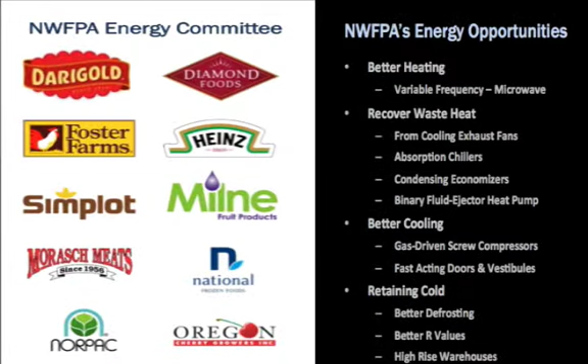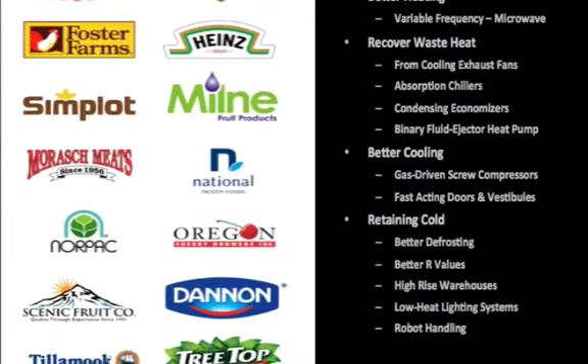So where did today's content come from? We worked with a pilot team of NWFPA members. They prioritized problems and opportunities for which externally developed innovations might be a solution for the entire membership. For each opportunity category, Emerging Tech Accelerator does a worldwide scan and identifies 50 to 100 solution possibilities. These short lists are then studied and ranked by the pilot team, and we invite the top-ranked innovators to present in this forum. I'll introduce the panel shortly, but first, here's a list of topics we'll be covering. If there's something you want covered that's not on that list, don't hesitate to ask using the chat screen.

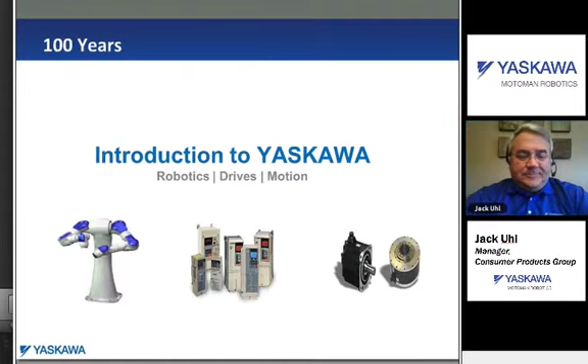Globally, we have facilities in 25 countries on 6 of the 7 continents, providing support from engineering, applications, and product development through assembly and integration. We also expand well beyond the food and beverage industry, with a presence in virtually all industries—from aerospace to medical, pharmaceutical, heavy industry, agricultural, and consumer goods.

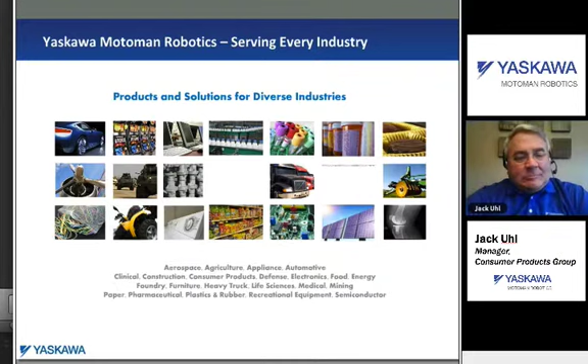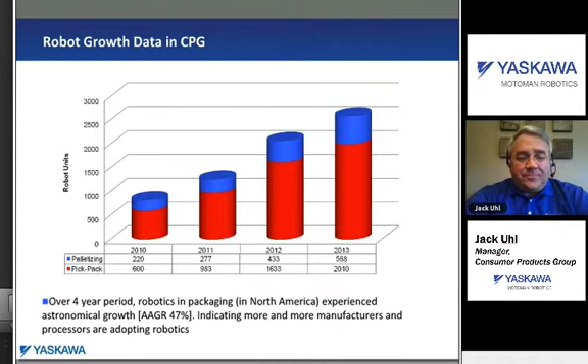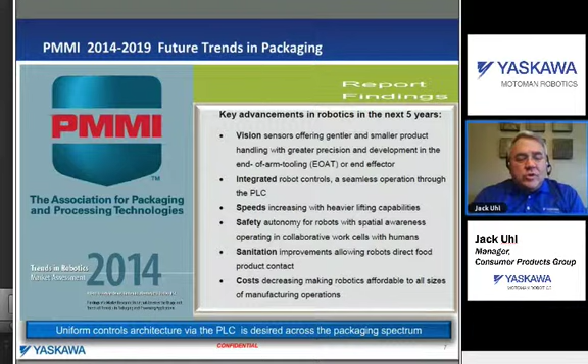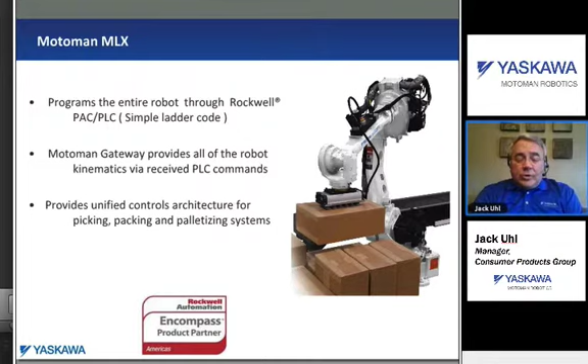We've listened to the customers, and the next slide will indicate some of the future involvements of that technology. We've defined the unified control architecture at Yaskawa as the MLX. What this means is we allow the robots to be programmed and controlled through a central PLC. In this case, it could be a Rockwell PLC, but it could be a Yaskawa motion controller, or it could be another brand of PLC. Ultimately, our gateway technology allows all the kinematics of the robot to be handled through our unique processor platform. But the operator interface and the programming of the cell is a very well-known ladder logic format, which is within the PLC.

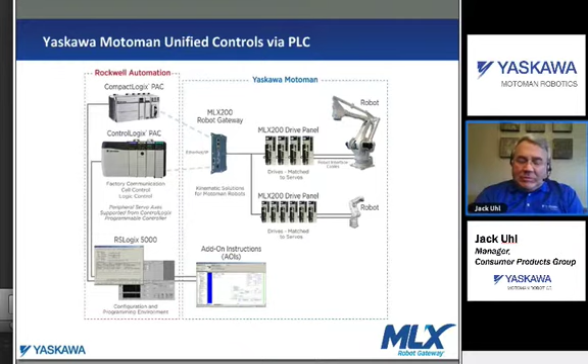And Yaskawa Motoman has developed this solution. Specifically, we provide our gateway module, which handles the heavy lifting of the robot kinematics, but a simple Ethernet connection to the PLC allows ControlLogix, RSLogix, to program the actual robot architecture. This is a unified solution—very simple, very cost-effective, without sacrificing anything in the controls.

So we take a big step back and we ask the question: well, why robotics in food and processing? Logical attributes: speed, accuracy, and longevity. It's a foregone conclusion that robots will last long beyond the legacy of the processing line. They are immensely accurate, many times more than what's needed, and the speed and repeatability of a robot can't be equaled by a human. So those are great attributes.

But when we drill down a little bit further, we realize that there are a lot of other positive attributes for the consideration of robotics within a food or food processing packaging environment. The first attribute, and what customers realize is one of the advantages, is flexibility. Robots permit operators to allow the actual cell design to be redeployed, reconfigured, and flexible for setup and operation for programming, which means a very quick changeover, a very simple operation.

The asset value of a robot is defined as a redeployable asset versus a fixed asset, which is a custom-designed palletizer, case packer, or picking scenario. A robot can be redeployed by simple programming and retooling to perform multiple tasks within an organization. Therefore, companies are realizing that they maintain an inventory generally of used robots and can redeploy them on short notice for other tasks and other purposes. The ease of use of robots, the unified controls, definitely provides an advantage for initial robot deployers and operators.

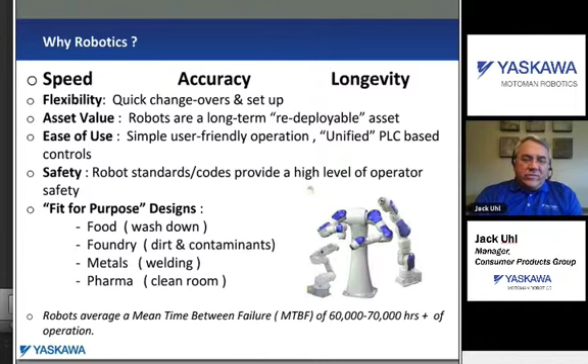So when we take a step further from the actual robot itself, and we've learned a little bit about the attributes and the benefits of a robot, now we want to drill down a little bit into understanding the complementary technologies that have also evolved that are deployed and utilized within robot applications. The first being vision. 10 plus years ago, vision was deployed, but those who had worked with vision realized that it was a challenging task because vision requires lighting, it requires contrast, etc.

The evolution and advancement of technology in vision have permitted cameras to be more intuitive, extremely powerful. But the tasks associated with vision have also required that they need to recognize parts and orientation, size the parts, understand if there's a defect, etc. The video will show us a little bit more how vision is deployed in a practical application.

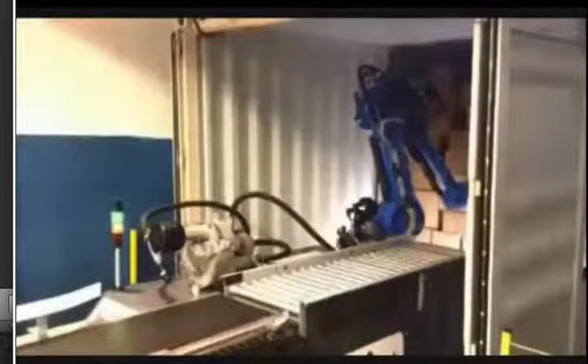We're showing here one of our Motoman partners who has developed technology for utilizing robotics for truck loading and unloading. If you look inside the trailer, you'll see a myriad of different size cases, and the robot is executing an initial mapping task with vision and lighting to understand and see basically where all the grid coordinates are for all of those cases. Those grid coordinates are then very quickly and efficiently mapped to the robot control for trajectory execution.

So the robot simply follows its map of coordinates of all the location of cases, and ultimately performs the task of seeking those particular cases in a very precise orientation and discharging those on a takeaway conveyor. So this is what's defined as spatial vision, and this is one of the attributes where vision has really evolved from a 2D dimension ultimately into a 3D dimension. Thank you.

As far as tooling, obviously robots have a kinematic profile like a human being. So again, we're migrating from the skeleton of a human and applying, in simple relative terms, deploying technologies to emulate what a human does. So the next step would logically be the tooling, which is in essence our grasping hands or fingers, etc. Tooling has been very generic for many years.

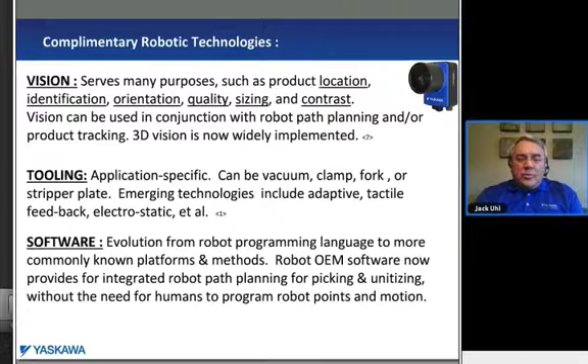Vacuum cups, clamp paddles, forks for bags, maybe a stripper plate for cans - and certainly that's probably the 80-20 rule. 80% are generic tools and they work fine and they're very functional. But there's a lot of different technologies now in end-of-arm tooling that allow robots to be deployed because of the tooling capability, whereas prior they inhibited the robot deployment. So the next video will show, again, just a smattering of some pretty neat technologies as far as the evolution of tooling.

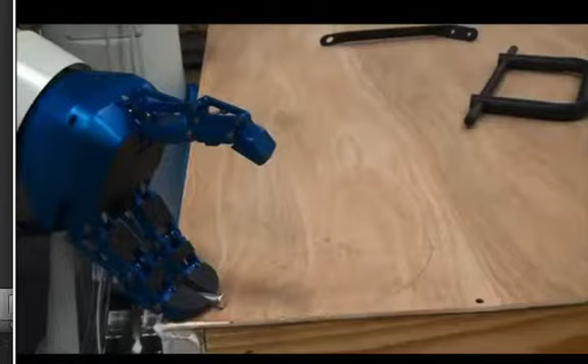This is a tool by one of our partners called Robotiq. It's a 3-fingered tool, and one of the advantages of this is certainly the dexterity. Each finger has multiple joints. It can work on multiple axes, from either a side clamp or a collapsing multi-joint grasp.

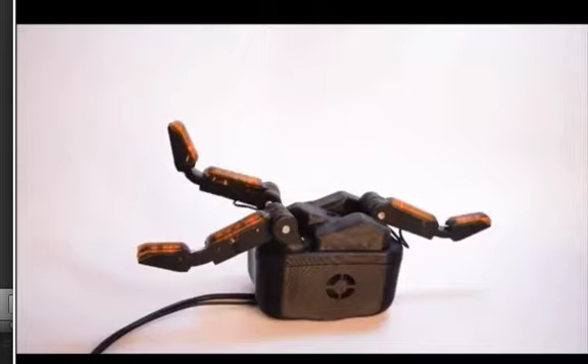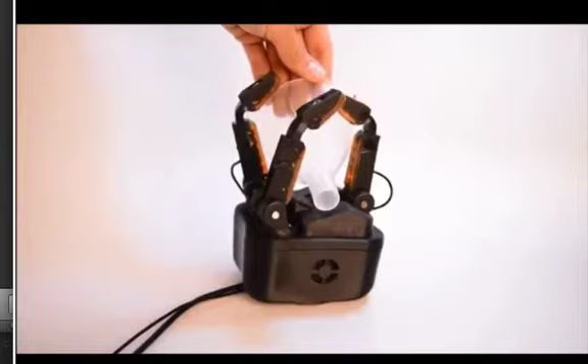This has evolved into a similar type of technology, by Rethink Robotics, or Right Hand Robotics. This is actually a tactile feedback tool. If we look very closely, the actual fingers have tactile feedback. The purpose for this would be to grasp very light, very flexible, very unique profile parts. The tactile feedback allows the force spectrum to be interpolated and commanded to apply the correct grasping force.

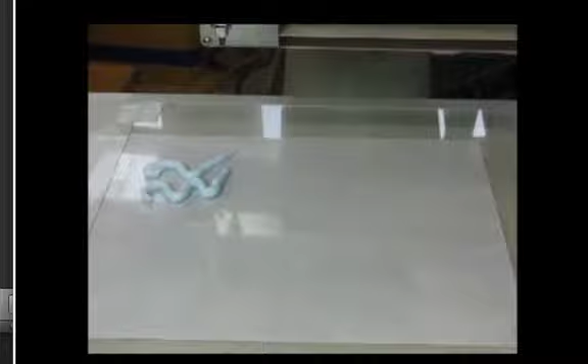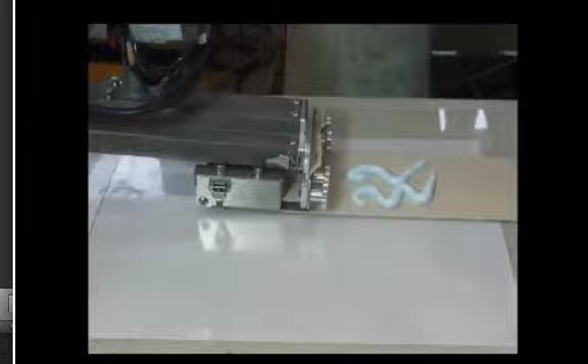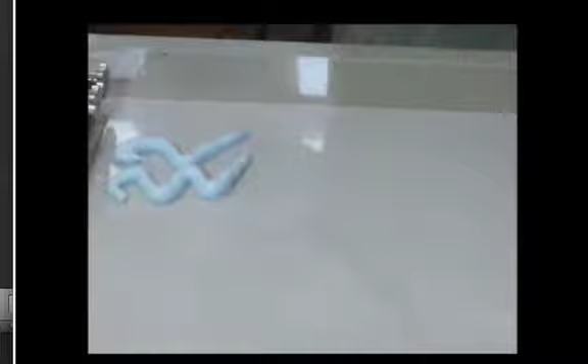Without ultimately crushing the product. This particular video is a micro belt swivel tool. This allows for showing an actual liquid, or a foam if you will, being able to be picked off of a bed and relocated without disrupting the profile. This again is just an example of an out-of-the-box tooling solution, but it does illustrate that with technology and the emergence of product profiling, we can develop tools for very unique product profiles and tasks.

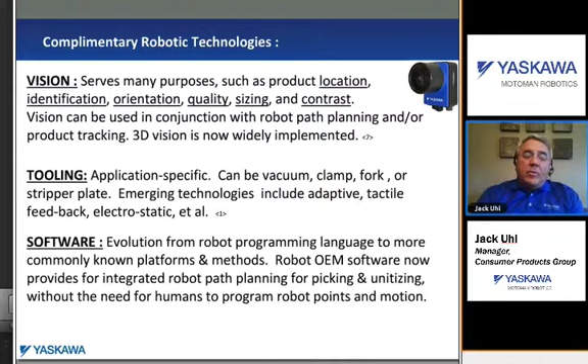Software is ultimately the brain of the robot. The operating software from a robotic platform can be intrinsic to the actual product profile and path execution of the robot, but robot OEM manufacturers such as Yaskawa Motoman have evolved the software to provide task-oriented software solutions. An example would be palletizing, which we'll show on the next slide, where it allows the actual robot execution to be pre-pathed and executed by the software rather than allowing operators to command the pick points and trajectory points. Motoman has developed what we call Pallet Solver.

It is extremely powerful offline PC generated palletizing software which allows for the importation of palletizing patterns from third sources. We can assign cell obstruction zones, the robot tooling size, the actual zoning of the pneumatic tool, all pre-programmed. The simple operation allows for case sizes, length, width, and height, to be put into a GUI through the PC, so it's a very visual platform.

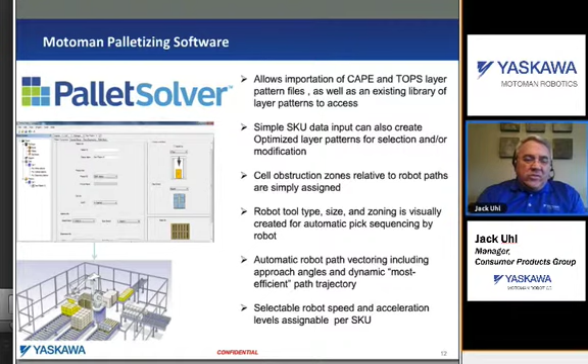The data will then be optimized and layer patterns can be created. The final result is the pick execution of the robot to the picked cases, the path trajectory, the velocity and speeds, and the entire pallet build is all automated via the software. There is virtually zero programming of points required by the integrator or the end customer. So this is an example of a task-specific software solution that eliminates the heavy burden of actual robot programming. It's simply inputting data into a PC, and the entire robot kinematics are pre-programmed and executed.

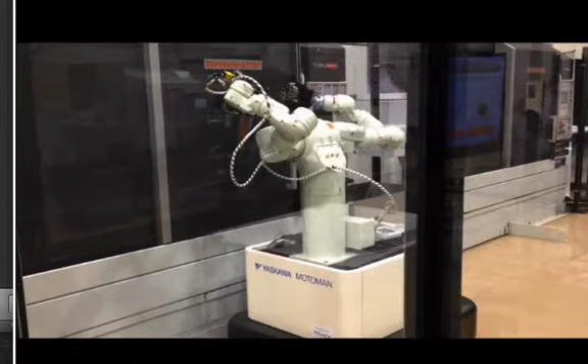This is not food per se, but this is something that recently has been developed by Yaskawa Motoman. If you look closely, you'll see one of our dual arm robots tending to multiple machine cells, but you'll see the capability of the robot then to be relocated from point to point, self-docking, and then performing its multiple tasks, taking advantage of the ability to use one robot for a very wide physical space of operation.

Safety is a necessity, and we are not only governed by RIA as far as safety standards, but safety is probably preeminent within Yaskawa Motoman. The fortunate advantage for the dedication to safety is that through RIA and ANSI, there have been an evolution of safety tools that permit robots to work in a collaborative fashion with operators, programmers, etc.

There's a couple different definitions of collaboration. One is speed and separation. The other is force limiting robots. But ultimately, this allows for the safety fences to be in a very compact method. It allows for operators to actually enter the work cell, and the robot will then enter into a safe working speed with a separation of distance between the operator and the robot.

The force limiting robots that are much smaller capacity and a little bit slower operating allow for tactile feedback through the force limiting features that they possess. So if an operator reaches in and the robot arm is on a path and touches the operator, it will stop in a safe mode or a safe speed.

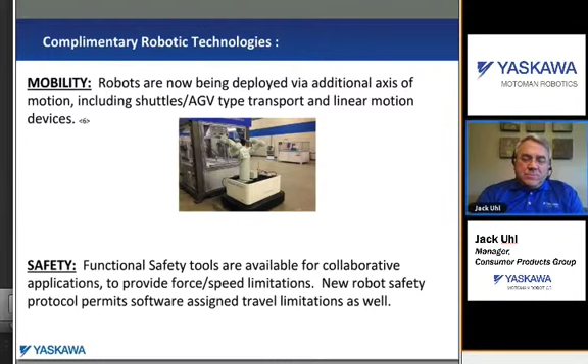But the summary is safety is emerging, it's evolving. ISO is performing some additional testing in Europe as we speak to determine what's defined as the anatomical correct torso force pain thresholds. And what that means ultimately is that as we begin to see safety regulations continue to evolve, we'll begin to see robots become more and more collaborative and interactive with humans. Next.

So when we start now drilling down to the ultimate purpose of our dialogue today, we want to take a look at where robots are deployed from processing through primary packaging, ultimately into secondary packaging. Next slide.

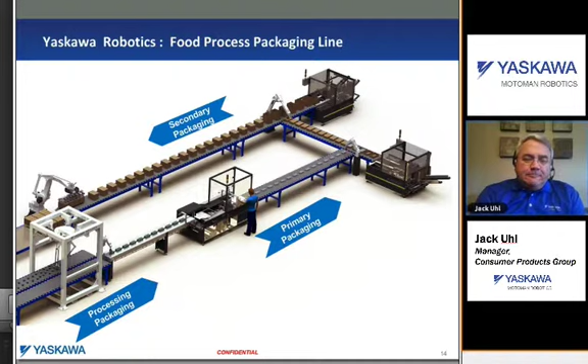At the front end of the line of processing, when the raw materials are introduced into an environment, we begin to see that there is a demand for some type of automation, obviously because of the labor aspect. But one of also the current drivers for looking at automation and processing is the Food Safety Modernization Act, or what's referred to as FSMA. This has been released in 2014. Next year and the following year is the scheduled final implementation. And it's really changing the landscape for food and food processors, which most of you, I'm sure, are very much aware of.

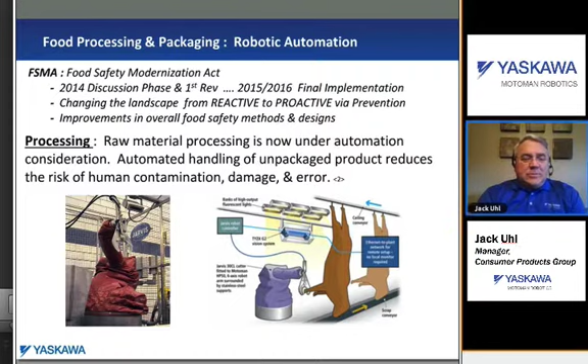A typical example of a solution for robotic automation in processing, one of our partners deployed Motoman arms with stainless steel hydraulic shears for the actual processing of livestock. There would be an inspection process. We would track the actual carcass, and limbs or primary cuts would be utilized via vision and a technology of path following through the robot to actually process and do the initial handling of the actual food product in preparation for the next steps. But I'm not going to show you that video today. It might be a little bit hard to watch, but we've got a couple other good videos coming up that will show some examples of robots in food processing environments.

In the primary side of packaging, automation is certainly, as the slides indicated earlier, on a track for escalated growth. Primary packaging is defined as picking the raw material, putting into the primary, could be a sleeve or a carton or a case. But what's required in primary packaging is generally speed, orientation of the product, because they're coming out somewhat random through your initial food processing, could be ovens or chillers or IQF, and also some inspections of quality and orientation. The video coming up will show some great examples of primary packaging.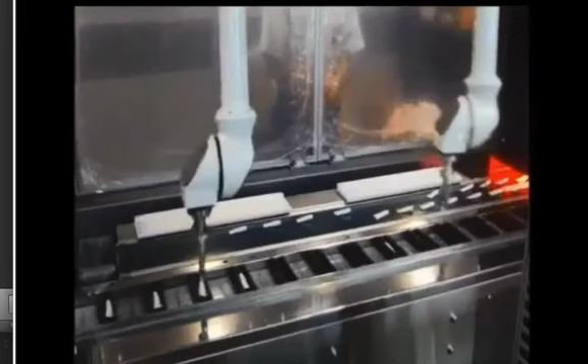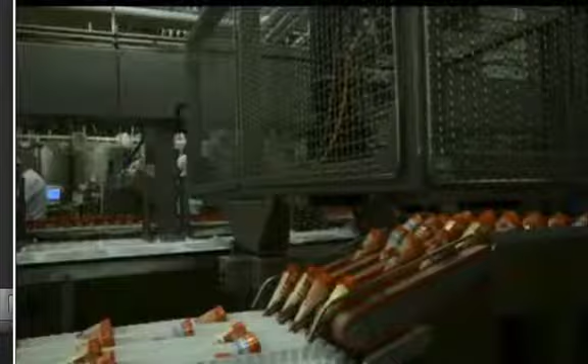What robots generally do an excellent job at is understanding motion control, path following, and orientation. This is a good example showing primary picking of products from an in-feed belt, relatively random, but reorienting them and putting them into pockets for flow wrapping or over wrapping. This is a tried and true method of solutions. You can imagine how many hands would be required to do that function.

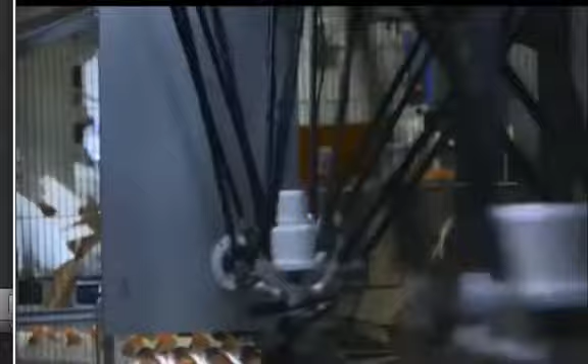This is a really neat application. This is frozen ice cream cones that are packaged and ready to be put into cartons. The profile of the cone is challenging. It's a tapered cone, it's round, but yet it's not consistent from head to tail. High-speed Yaskawa Motoman Delta robots are performing the picking and task executing.

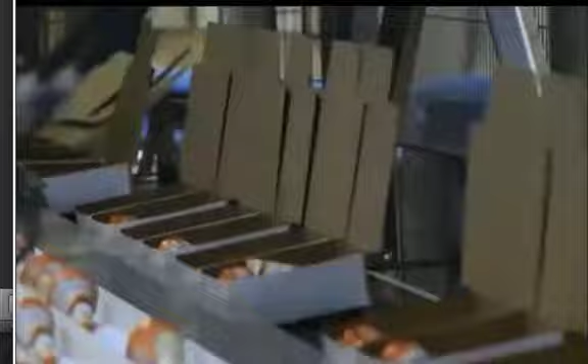We do zone to zone to zone balancing through the 4 robots. So you'll begin to see how we transition product from zone 1 to 2 to 3 to 4. But the picking sequence requires the products to be alternated and nested within the actual cartons. So you begin to see how fast that can be performed and how accurate and consistent robots can perform primary packaging by placing alternating goods into the cartons, ultimately down for secondary and final completion for packaging.

Secondary packaging is what we all know has been very commonly deployed in robotics. Palletizing, maybe case packing, for probably 20 to 30 years we've automated that function. But there has been a change, and the change was driven by the sustainability efforts within the supply chain. More and more manufacturers are driven by the need to reduce the actual packaging content, to have dynamics associated to the types of products that you fill or package your products in.

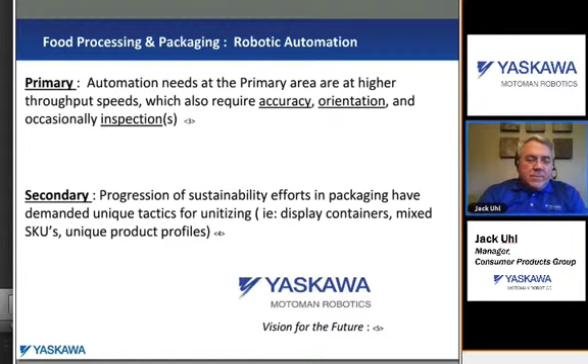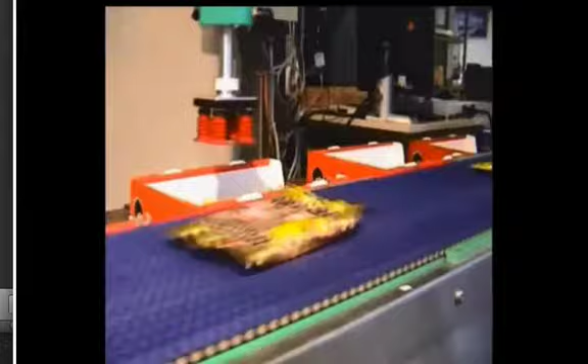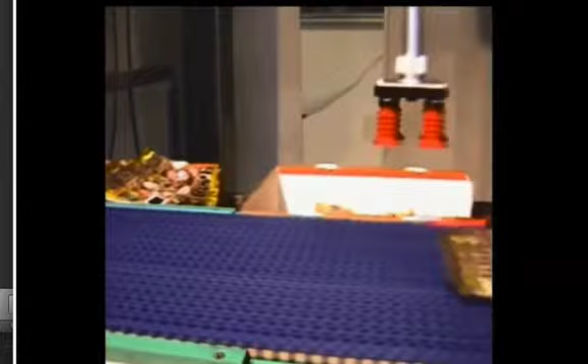The bottles, the containers, the shapes are infinitely changing. All those supply some challenges for packaging and for automation. The videos coming up will show a couple good examples. In secondary packaging, now we've got the product in a bag. We can pick, track, nest, cavitate into what's called a display case. Packagers don't really like this type of case, but obviously sustainability is driving that. It's a point of purchase display. Sides are open, tops are open, but again, we have to pick that on the fly.

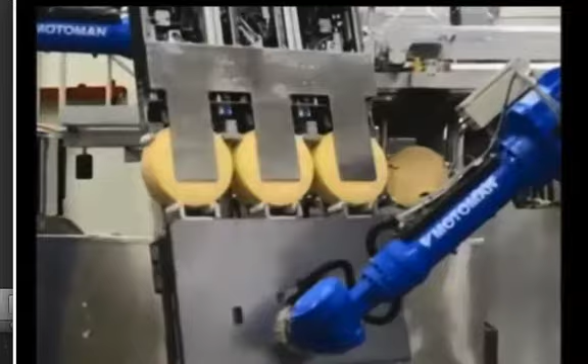As far as an example within a plant for secondary packaging, this is cheese. And you begin to see that robots can do some very unique tasks. Here we're picking up large wheels, placing them onto an actual shelf for another process. But you'll see shortly how robots can collaborate with each other based on a need for reorientation. So we can have one robot hand off to a second robot in a collaborative workspace with high accuracy and perform a secondary task.

And that's the summary of today's event.